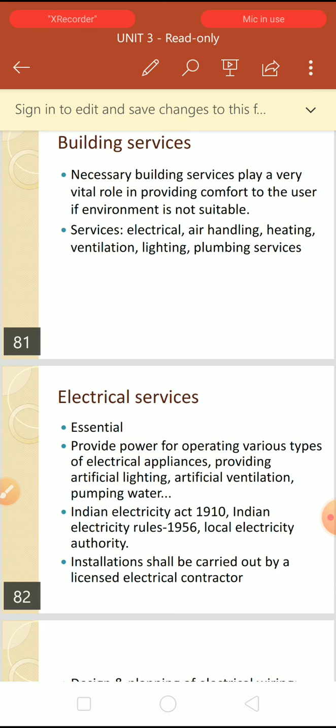Good afternoon students. In this video we are going to discuss one more building service. We will discuss a few building services like electrical service, telecommunication, rainwater harvesting. There are different types of building services we can provide. So let's start.

Necessary building services play a vital role in providing comfort to the user if the environment is not suitable. I already told you the importance of building services, because it mainly gives comfort to the people, to the users. There are different types of services: electrical, air handling, heating, ventilation, lighting, plumbing services. There are so many different types of building services.

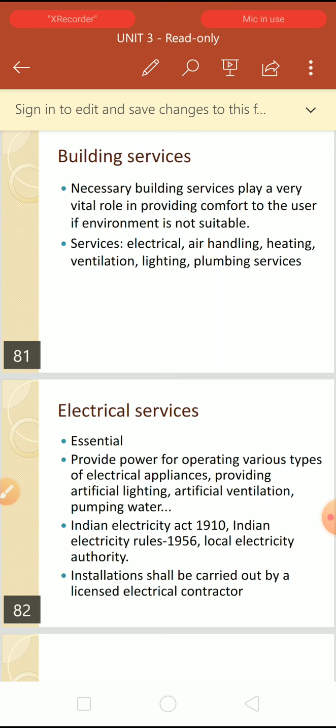I think in the previous videos we discussed about sound, noise, acoustics, and also we discussed about ventilation. So let's see other different types of building services.

In this electrical service, obviously it is a very essential one, everybody knows, and it provides power for operating various types of electrical appliances, providing artificial lighting, artificial ventilation, pumping water. So for all these things - pumping water, ventilation, lighting - electrical services are the most important one.

The Indian Electricity Act 1910, Indian Electricity Rules 1956, and the Local Electricity Authority have given some guidelines for the installations of electrical services. The installation shall be carried out by a licensed electrical contractor. So whatever installations you are going to do, it has to be done by a licensed electrical contractor for safety purposes.

The design and planning of electrical wiring mostly depends upon what type of building you are going to construct, or what is the requirement of the consumer, because different types of buildings - educational, residential, or mercantile - will have different requirements for electrical wiring. So the architect should consult an electrical engineer while doing this design or planning.

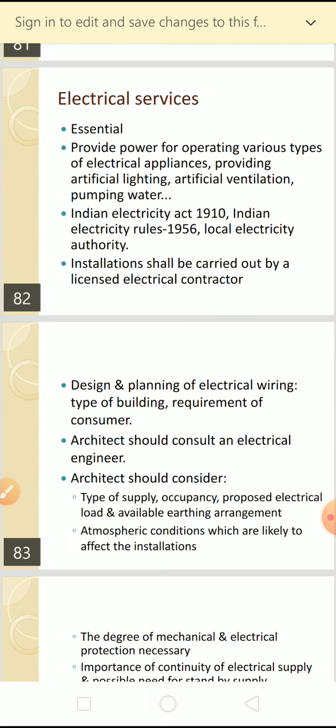So that's why the architect's main job is that while designing or planning, he has to consult the electrical engineer.

And also you can ask about the degree of mechanical and electrical protection necessary - how this protection should be.

You will also tell what is the importance of continuity of electrical supply and possible need for standby, depending upon the occupancy or type of building - whether the electrical supply standby should remain or not, what the maintenance cost will be, or if there are any other alternative methods related to energy conservation, like any new scientific way to conserve energy, any different types of sources, and what the space requirements are.

Then about the space requirements for accommodation of the substation - if it is a very huge building, there will be transformers, switch rooms, cables, substation space, and the space required for all this. So all these things, distribution cables, all this information will be given by the electrical engineer.

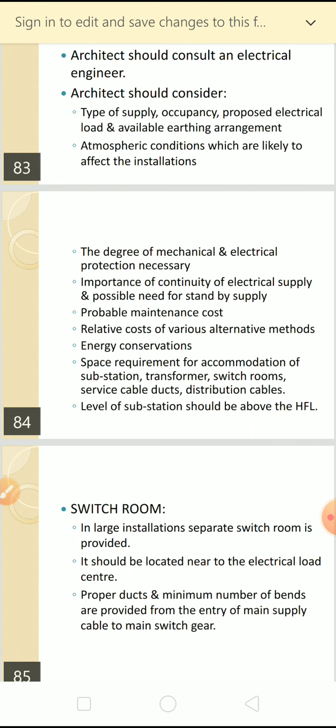One more important point is wherever you are going to provide the substation, it should be above the high flood level - this is for safety purposes.

There is a term called switch room in large installations. If it's a very huge residential or educational building, a separate switch room is required, and that particular switch room should be located near the electrical load center. That's why in most education buildings, the electrical load center and switch room are either at the same place or right next to each other.

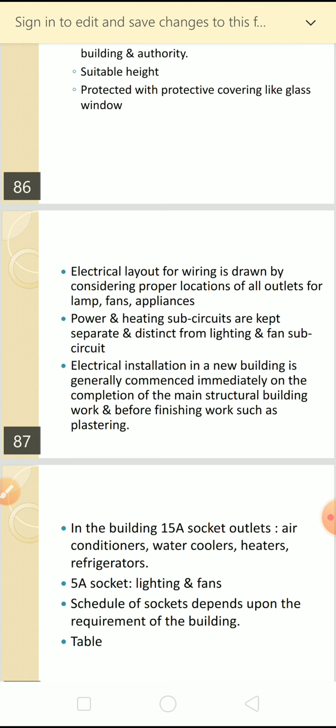It has to be planned well in advance so that suitable provisions are made in the building plan. For any building service, proper planning has to be done so that once construction is done, including these things later becomes very difficult and expensive.

Wiring for telecommunication in small buildings is undertaken by the telephone department on surfaces. That means normally for small buildings, the wiring is taken by the telephone department on surfaces, but for bigger installations, you have to use conduits.

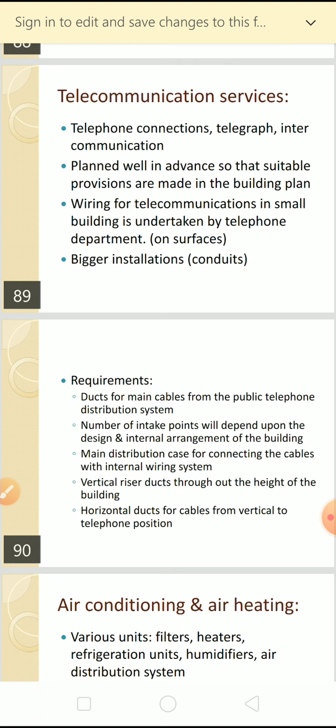Requirements include ducts for the main cables from the public telephone distribution system. That means whenever providing telecommunication wiring systems, from the main supply you have to bring the wiring through a duct for further distribution.

Number of intake points will depend upon the design and internal arrangement of the building. Obviously, how many intake points are needed depends upon the type of occupancy.

Whether it's residential, it's different; for companies it's different, or for education it's different. So the main distribution case is for connecting the cables with the internal wiring system. There has to be a main distribution system, then there is an internal distribution system. All these things should be well connected, proper, and proper material should be used.

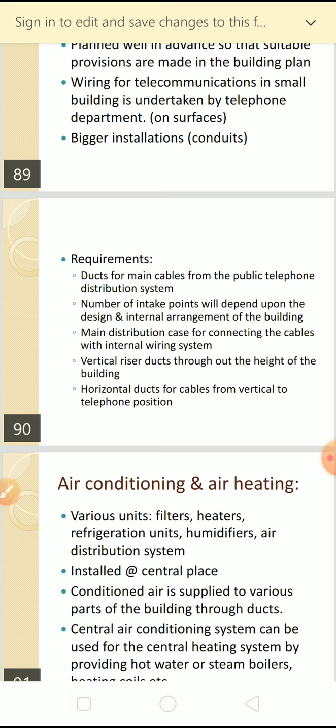Vertical riser ducts throughout the height of the building. You need to use vertical ducts for the entire height of the building, and also horizontal ducts, so that you can take the wires to their destinations. So this is about the telecommunication services.

And there is air conditioning and air heating, which we already discussed a bit in a previous video. If you take air conditioning or air heating, there are different units like filters, heater, refrigeration units, humidifiers, air distribution system. So many things come into picture. Air conditioning is installed at a central place.

Conditioned air is supplied to various parts of the building through ducts. If it is a centralized AC, it is installed at the central place, and whatever conditioned air is there, that will be supplied to different rooms or parts of the building through ducts. And even in the last class we studied about the different materials used for the ducts, like aluminium, plaster of paris, and so on. Central air conditioning system can also be used for central heating system by providing hot water or steam boilers, heating coils.

That is what I was telling - this is even used for heating purposes by providing hot water and steam boilers. So the next one is vertical circulation, that is lifts and escalators. You know the difference between lift and escalator - lift is vertical, whereas escalator is inclined. Both are used to transport materials or people from one place to another.

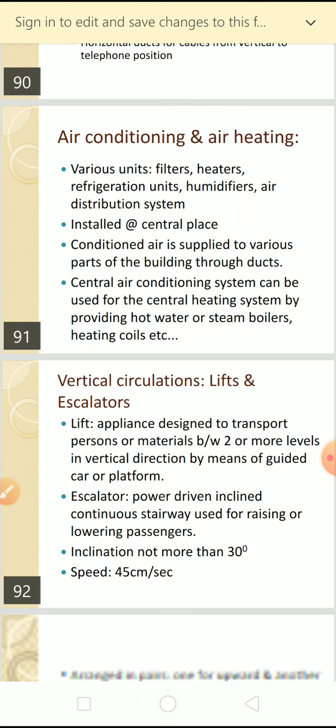Inclination should not be more than 30 degrees, otherwise it becomes a safety issue. And the speed of the escalator should be 45 centimeters per second. They are arranged in pairs - if you see any malls and all, there will be two escalators, one for the upward direction, another for the downward direction.

While designing a building, the architect should consider the following points. While designing whether it's a mall or any other type of building, the architect should keep in mind some points, like how many lifts should be provided for that building, what should be the size of that lift, where exactly it should be provided, what type of landing doors to provide, how many floors that lift is going to serve, and what should be the height between floor levels, and the number of entrances for the lifts or escalators.

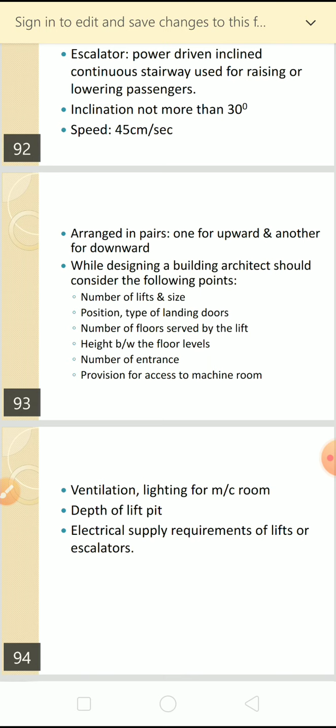Also if it is a lift, there should be a machine room, so where exactly that machine room should be provided, and what about the ventilation and lighting for that machine room and for the lift. There is also a term called the depth of the lift pit. And even the electrical supply requirement for the lifts, backup - all this information has to be considered while designing lifts or escalators.

So then there is another building service, that is rainwater harvesting, and this is a very common topic that you have already studied many times. The need for rainwater harvesting, the need of water - it's a very basic slide. For domestic use, that is drinking and cooking, agricultural purpose, industrial purpose, even sometimes for cleaning roads, firefighting - water is required for so many purposes.

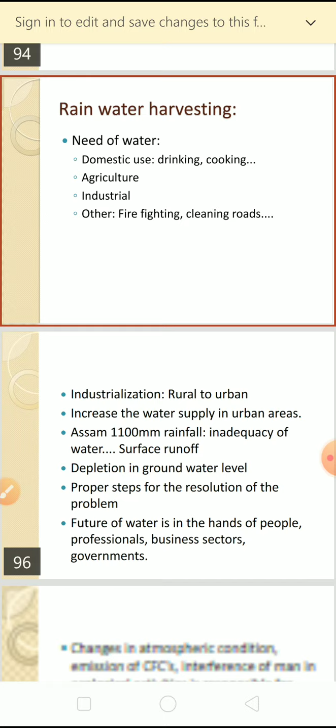So what happens is, because of industrialization, the population is shifting from rural to urban. As people keep entering into towns, cities and so on, there is an increased requirement of water. So because of that the requirement has increased a lot, and that's why there is a shortage of water happening.

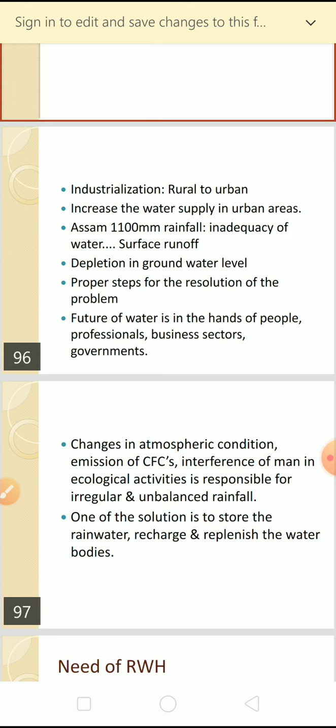Future of water is in the hands of the people, professionals, business sectors, governments. Obviously it is not the problem of only the government, even the industrialists, people, business sectors, even professional teachers, even every citizen should understand the importance of water, and they have to start saving the water without wasting it.

So changes in the atmospheric conditions, emission of chlorofluorocarbons, interference of man in the ecological activities is responsible for irregular and unbalanced rainfall. So you know what is the main reason why there is a shortage of rainfall, or why the shortage of water is there.

One of the solutions is to store the rainwater, recharge and replenish the water bodies. So how we can overcome this shortage of water, one of the best ways is whenever the rain comes, you save the water, store the water, recharge it, and you can replenish the water bodies. That means you can once again bring life into the water bodies.

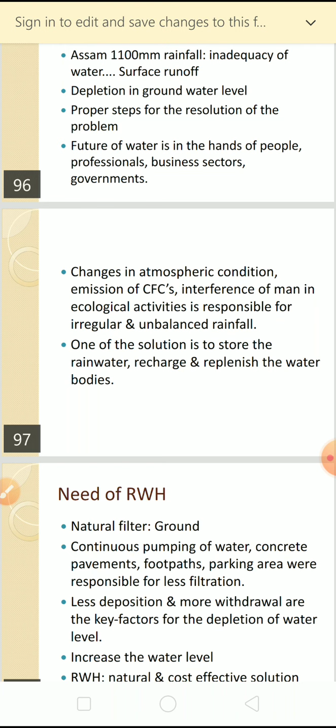So once again there is another slide we can see here, need of rainwater harvesting. If you do the rainwater harvesting, basically what happens is the ground acts as a natural filter. Continuous pumping of water, concrete pavements, footpaths, and parking areas were responsible for less filtration.

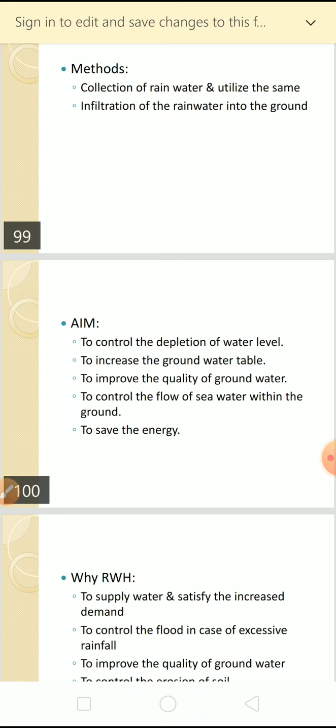So why rainwater harvesting? To supply water and satisfy the increased demand. This is one purpose - whatever demand is generated, we can satisfy that demand.

Then to control flood in case of excessive rainfall. Even if heavy rainfall happens, there won't be flooding from surface runoff because you are storing that water. And to improve the quality of groundwater, to control erosion of soil - when surface runoff happens, there are chances of erosion, so you can stop or control that too.

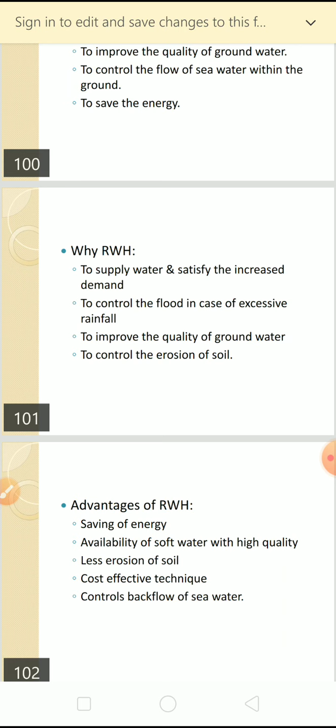So there are a few slides that are almost the same - advantages, why, and what is the aim of rainwater harvesting.

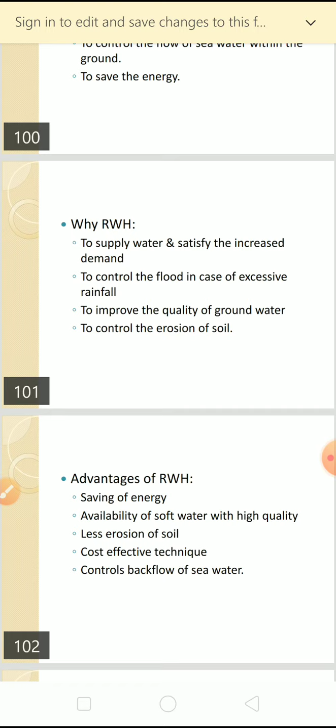Advantages of rainwater harvesting are saving of energy, availability of soft water with high quality that is pure drinking water, less erosion of soil, cost effective techniques, and controls backflow of seawater. All this information I already discussed in the previous slides.

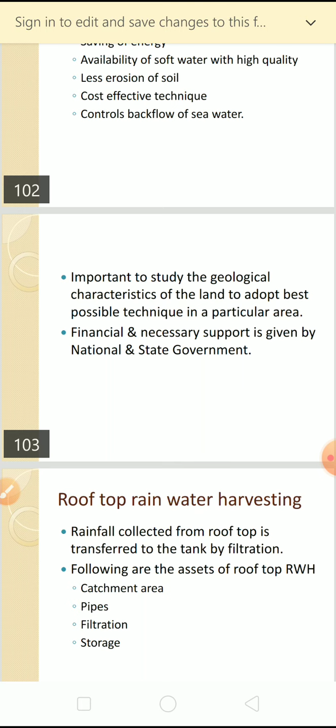Financial and necessary support is given by national and state government. Even state and central government are providing some schemes for rainwater harvesting. That means even if you are a residential person in a residential area and want to implement rainwater harvesting, the government is going to financially support some percentage of whatever the project cost is - that will be provided by the government itself.

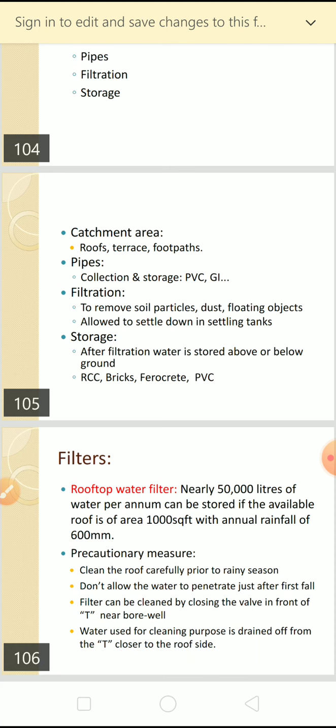So filtration is the most important part. Rooftop water filtration - nearly 50,000 liters of water per annum can be stored, which is a huge amount of water, if the available roof area is 1000 square feet with a rainfall of 600 mm per year.

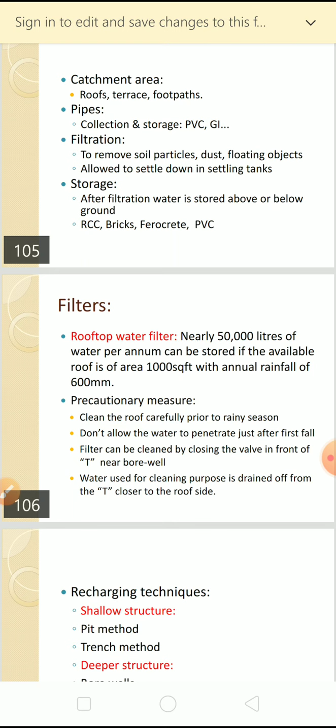So some precautionary measures have to be taken. Clean the roof carefully prior to the rainy season - obviously, before the rainy season comes, you need to clean the roof once, otherwise the water will come in dirty.

Don't allow the water to penetrate just after the first fall. The filter can be cleaned by closing the valve in front of the T near the borewell. So basically what you have to do is not utilize the first rain too much - let that one penetrate normally, you can waste it.

Filter can be cleaned.

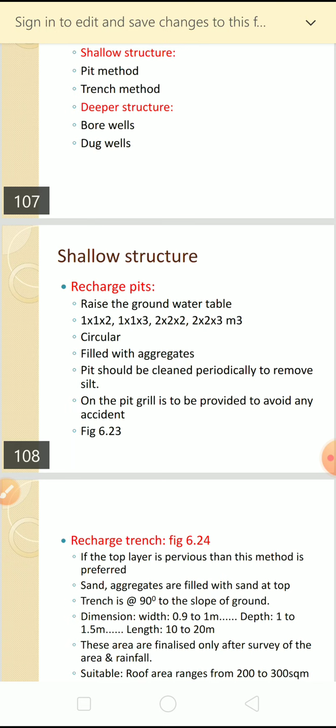So same thing - if you take a recharge trench, if the top layer is pervious, then this method is preferred. Sand and aggregates are normally used; as a civil engineer you may have seen sand and aggregates used for filtration purposes. At the top you can fill aggregates first, then smaller aggregates, then you can use sand aggregates on the top layer, or last put sand and then different sizes of aggregates to do filtration.

Dimension: trenches at 90 degree to the slope of the ground obviously, and dimension is width 0.9 to 1 meter, depth 1 to 1.5 meter, length 10 to 20 meter, and these areas are finalized only after the survey of the area and rainfall. So obviously how much trench to give, which material to use, all this can only be decided after a survey, because you should know what soil is in the area and how much rainfall comes - all this information should be known.